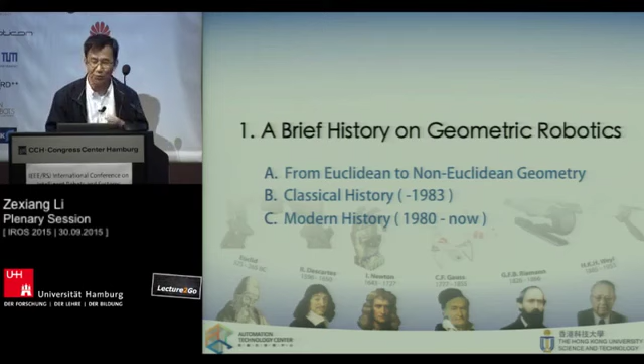So geometric robotics has two parts: one on the geometry, the other the use of geometric tools for the analysis of robotic problems.

On the geometry side, there is Euclidean geometry and non-Euclidean geometry. The central piece of Euclidean geometry is the Euclidean space and its geometric properties. Euclid, in his Elements, postulated the properties of Euclidean space. Descartes, through the introduction of coordinates, allowed us to identify points in Euclidean space with n-tuples of numbers, which we refer to as R^n.

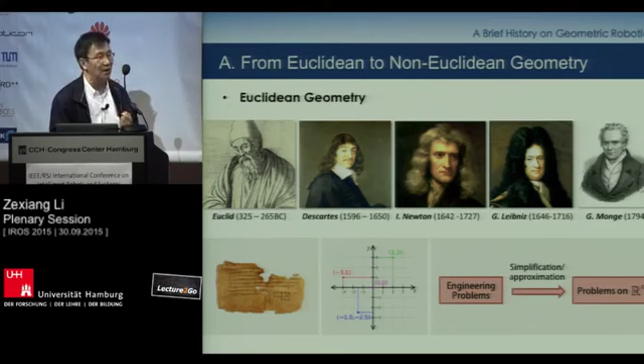Leibniz and Newton built calculus on Euclidean space, and 100 years later Monge introduced calculus to the engineering community. Today we know that by simplification or approximation, we can formulate an engineering problem as an optimization problem in R^n.

And those are the masters of non-Euclidean geometry. Gauss formulated one- and two-dimensional differentiable manifolds, which we know as curves and surfaces. Riemann generalized that to higher dimensions, three and above. Sophus Lie and Felix Klein introduced Lie groups and transformation groups, and the notation we use today is due to Hermann Weyl.

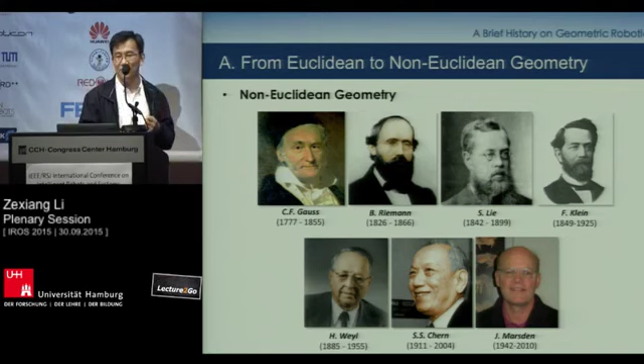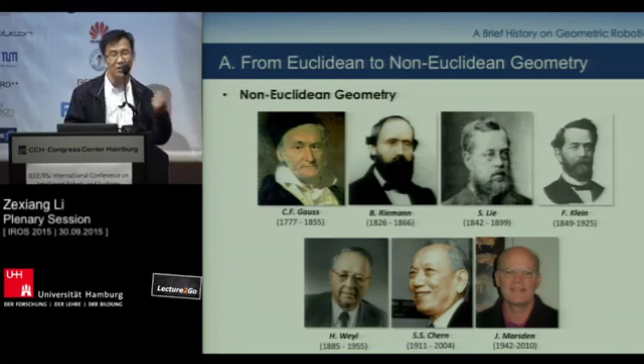S.S. Chern is a master in geometry, but his influence on the engineering program at Berkeley is equally impressive. Jerry Marsden built the bridge between the geometry community and the engineering community.

And of course, geometric robotics has its roots in the classical screw theory. That deals with the infinitesimal motion and finite motion of a mechanism under constraints. And Francis Reuleaux laid the foundation of kinematics.

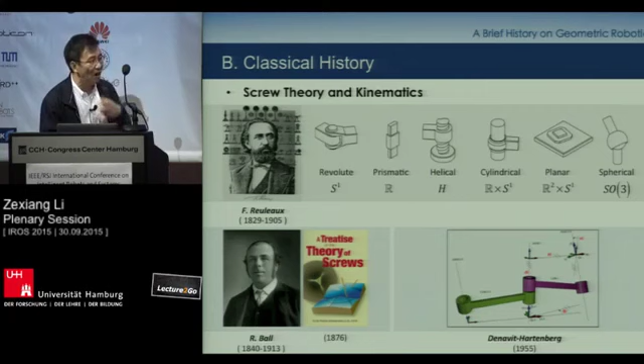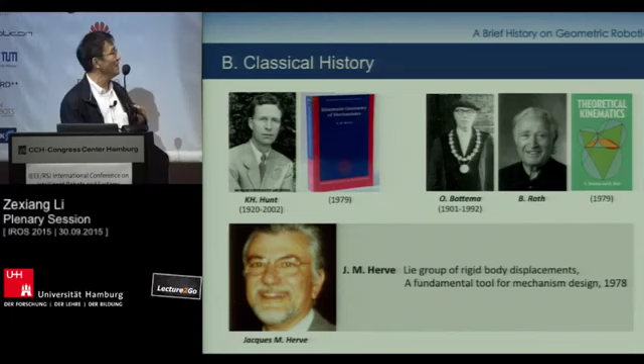He introduced the six lower pairs which generate subgroup motions, and Robert Ball, the foundation for screw theory. Hunt, Bottema, and Roth are masters of kinematics and mechanism design, and J. M. Herve used Lie group theory to study mechanism design.

So those are probably what I can call the classical history. The modern history of geometric robotics was opened up by Roger Brockett with his famous formula, the product of exponentials.

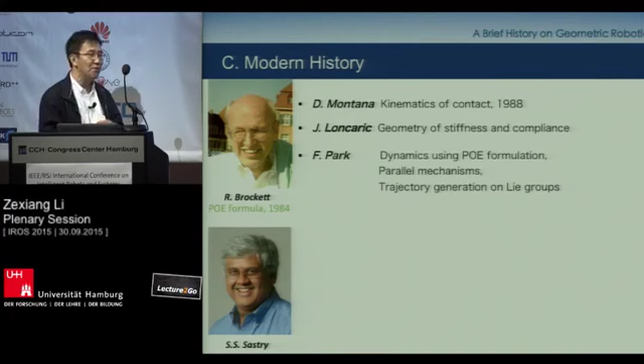He also produced a group of outstanding students who became important contributors to the field, including Montana, Loncaric, and Park. And Sastry started the Berkeley group along the same tradition with Paden, myself, Rich Murray, and also Ma, applying this to computer vision.

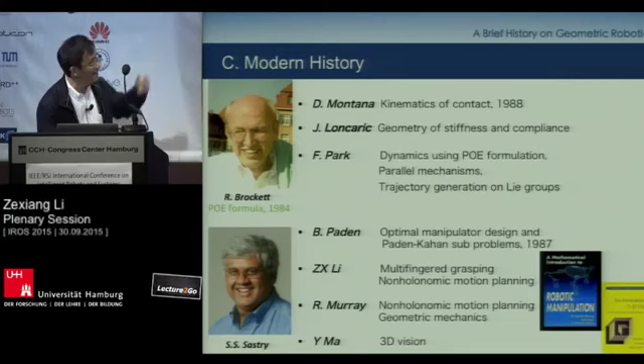And the work on manipulation is documented in these two books.

Tomas Lozano-Perez introduced the C-space concept, and also the MIT group, Mason and Canny, applied this to various other problems of robotics. And also the Burdick group from Caltech and his students applied it to snake robots, hyper-redundant robots.

Martin Buss introduced geometry to grasping force optimization and non-holonomic hands. And Vijay Kumar, from his wonderful work on flying robots, Lie group geometry is apparent there.

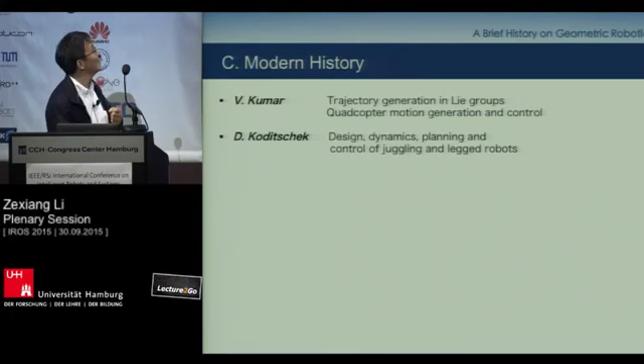Koditschek, the GRASP lab, and also those are important contributors.

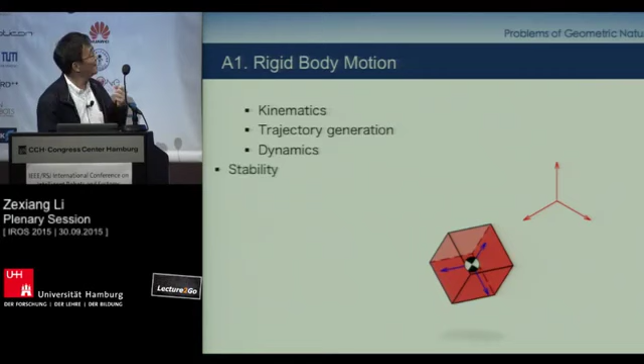So I will collect a few problems which are geometric in nature. In other words, without understanding the geometry underlying those problems, you will not be able to have a full understanding of those problems. These include rigid body motion, kinematics and dynamics control, and open chain manipulators.

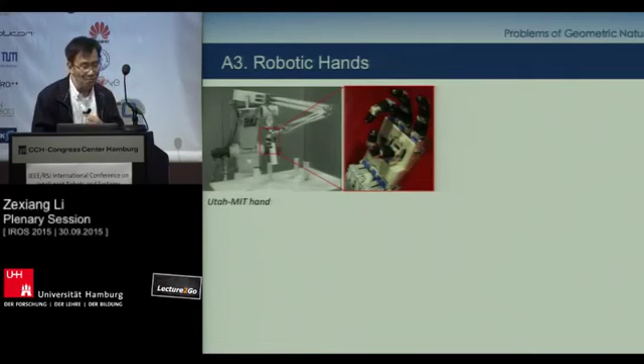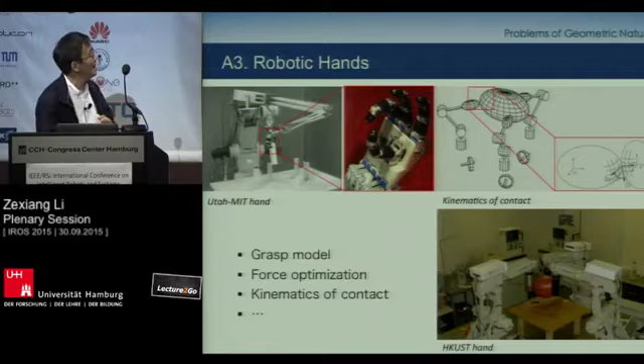The forward and inverse kinematics, and parallel mechanisms, the synthesis of robotic hands, how to model grasp, and also force optimization, kinematics of contact, and also parallel mechanism synthesis and design.

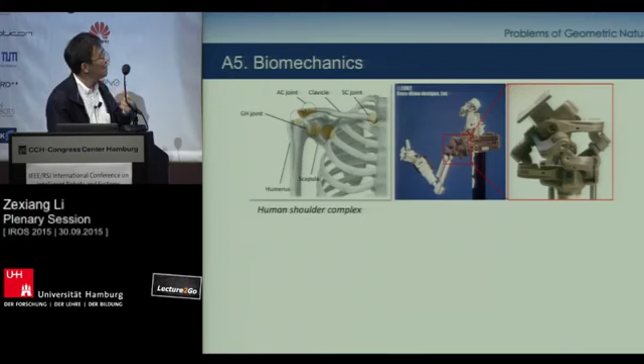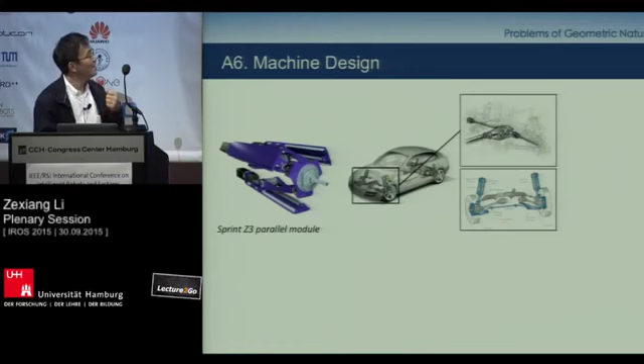Biomechanics: how do we model the joints of the shoulder, the eyeball movement, in a very natural way? And also critical components in machine design, such as CV joints and parallel mechanism machine tool modules.

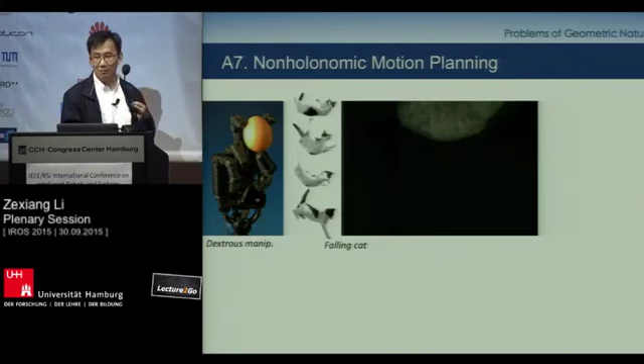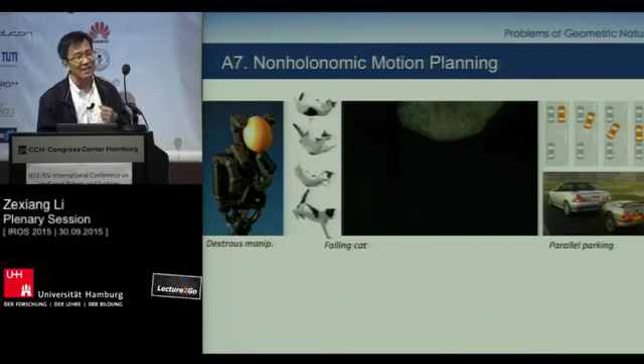And the non-holonomic motion planning, how do you manipulate a ball within the hand without dropping the object? How do you understand a falling cat reorient itself? And also, how do you understand parallel parking of a car, even with a number of trailers? So those are the non-holonomic motion planning problems, analysis, motion planning, etc.

And also some problems apparently don't have that nature, but you can model them as geometric problems. For tolerance control, you need to give mathematically precise definitions of tolerance notions and algorithms for their verification using vision, laser, all kinds of sensors.

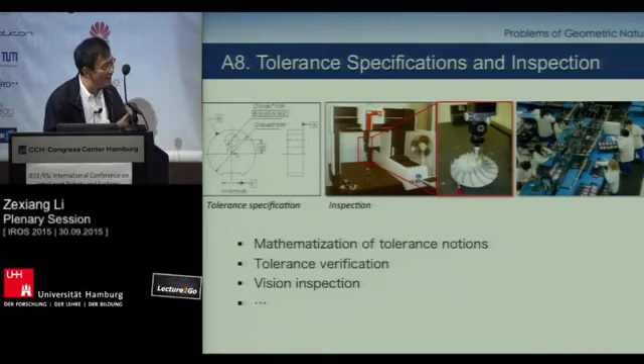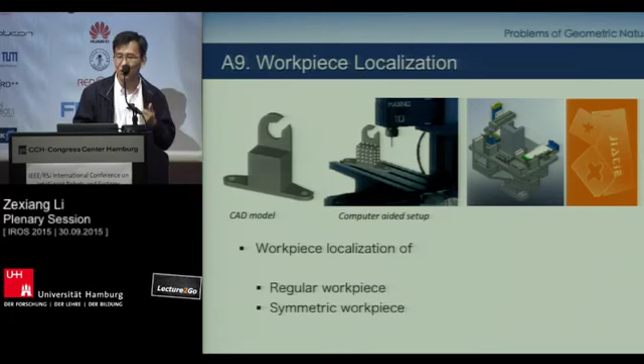And the localization of a workpiece, they either have no symmetry, have symmetry, or are partially machined workpieces.

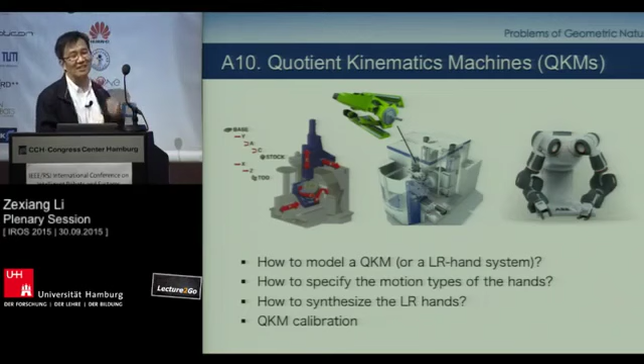And also for collaborating robots, left-right hand systems, which I call Quotient kinematics machines. The left and right hands may not be identical. So how do you describe such a system? How do you specify the motion types of the left and right hands? How do you synthesize such a system and their calibration?

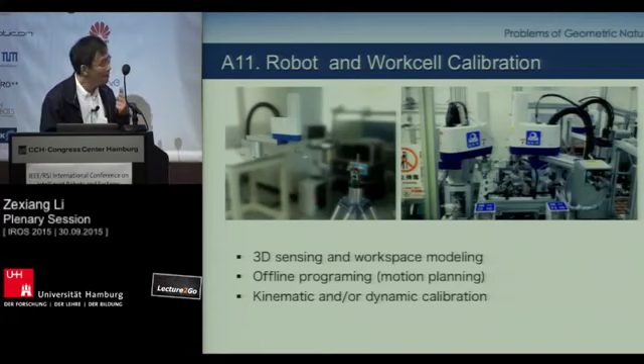And also now increasingly we use systems of robots for a Workcell. Many robotic systems are involved. How do we build the workspace model, offline programming, and the kinematics and calibration, etc. So these are the problems.

I will give a review, walk you through the basic concepts of geometric robotics. The main point is to identify the configuration space of the robotic problem with a manifold or Lie group, and then use the geometry of this space for optimization.

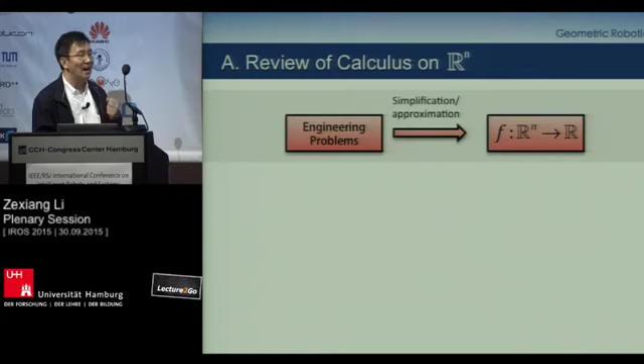Recall if we have a function defined on the Euclidean space, and we want to minimize this, we find critical points, use Hessians to decide if it is minimal or maximal, and to compute critical points, we have to compute the directional derivative. And to compute the directional derivative, we have to use the properties of the Euclidean space.

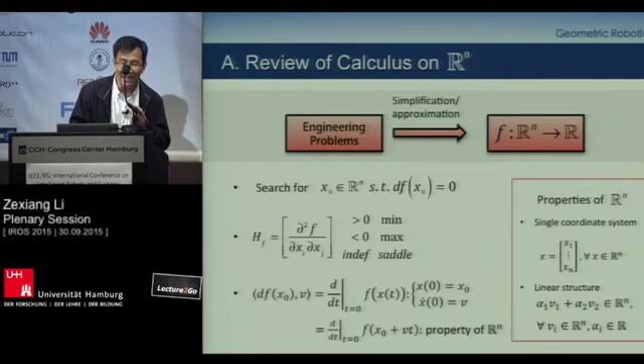And here are some simple properties of the space. It has one single coordinate system to identify all points of this space, and has a linear structure. But a manifold may not necessarily have all those desired properties.

An example of that is a unit sphere. How do we represent points on the unit sphere? We use latitude and longitude angles. We can do this except for the North Pole, South Pole, and the meridian line connecting those. Those are called singularities. Aside from the singularity, we have a one-to-one correspondence between points on the sphere and points on the coordinate plane.

So to make up for the missing points, we introduce another coordinate system, which also comes with its own singularity. For points other than the singularities, I will have coordinates relative to the red system and also coordinates relative to the yellow system. And we require the change of coordinates be smooth.

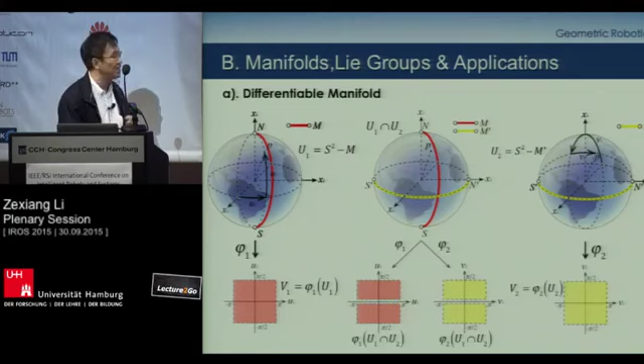So if we pile up all such coordinate systems until the union of the coordinate systems makes up the whole unit sphere, we have a differentiable structure. So a differentiable manifold is a unit sphere plus the differentiable structure.

Examples include the n-dimensional Euclidean space, the configuration space of a two-dimensional robot with revolute joints, and that of industry robots.

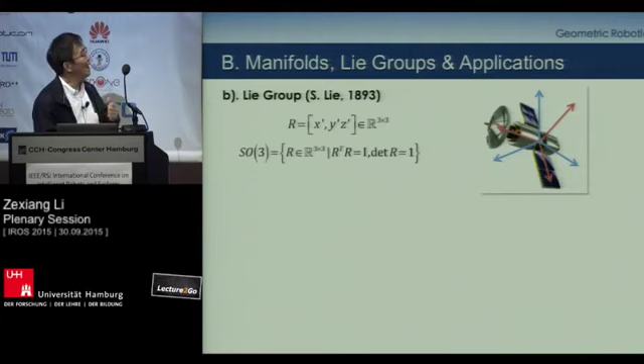A special example of a manifold is a Lie group. And we know in order to represent orientation of a rigid body, we use rotation matrices. And we found if we multiply two such matrices, we also get a rotation matrix. And when we take the inverse, we get another rotation matrix. So in other words, the set of rotation matrices forms a group, and the group operation is smooth relative to the differentiable structure of the set.

And that is what is called a Lie group. Another example of a Lie group is the set of homogeneous transforms, or the special Euclidean group of R3.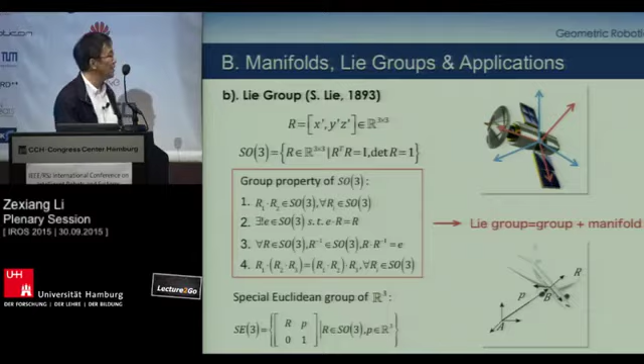And the advantage of a Lie group is that you have a canonical coordinate system to use for your computation, given by the exponential map. So if you look at the group and take the tangent space to the group at the identity, that is the Lie algebra. And that is how it looks like for those two examples.

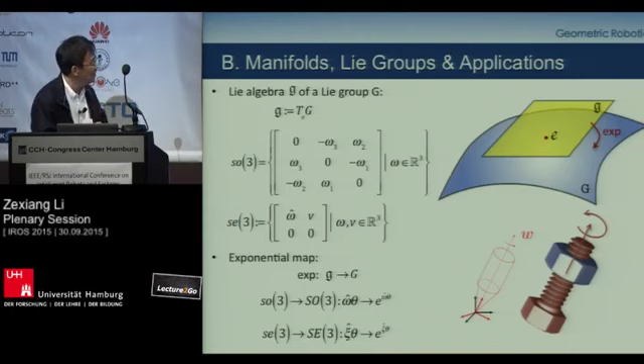And then you take the exponential, and for those two, the exponential is rotation about the axis or screw motion about the particular axis. And if we have a subset of a group, and if that is also closed under the group operation, it is a subgroup.

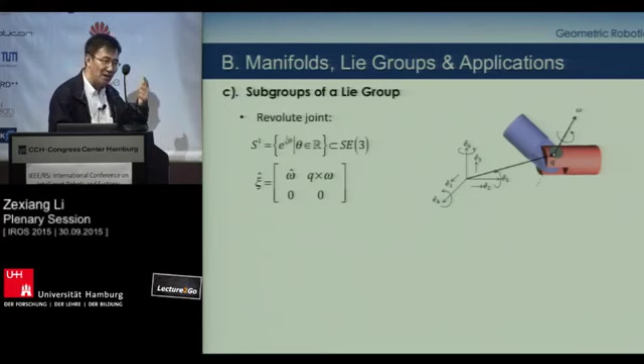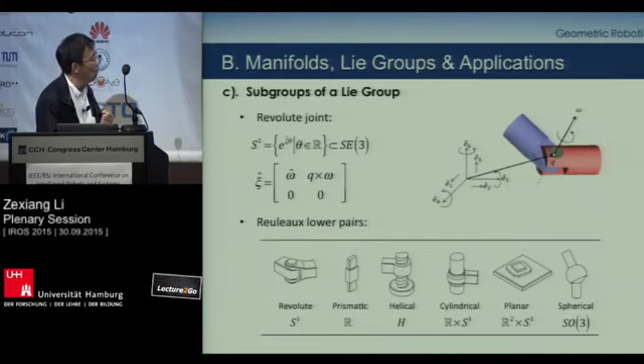So rigid motion generated by rotation about a revolute joint is a subgroup, and so are the rigid motions generated by the 6 lower pairs. They all form subgroups. And using those geometric relations, it is very easy to see the forward kinematics of an open chain manipulator is given by the product of exponentials.

And using this formulation, you have a beautiful derivation of the Jacobian, the inverse kinematics, and even proof of optimal workspace design of the elbow manipulator.

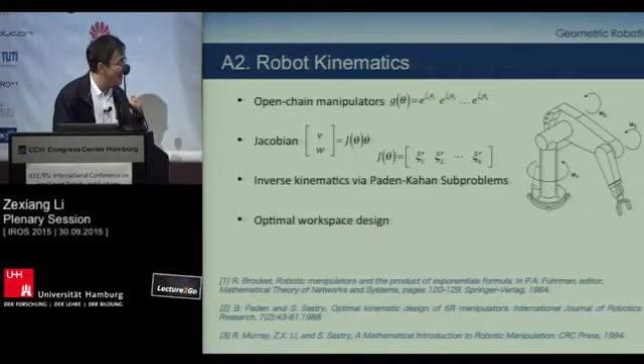And for the falling cat, we can model it as two rigid bodies coupled by ball joints.

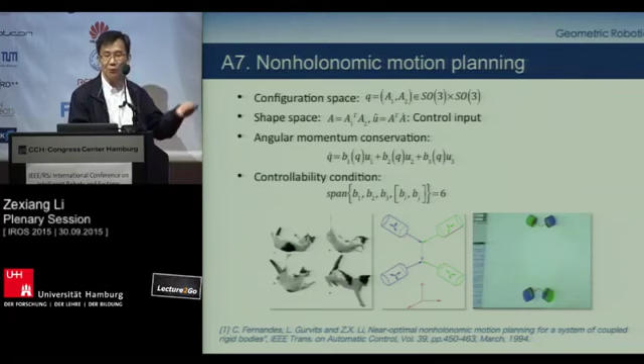The configuration space is then two copies of the rotation group. The control input of a falling cat is the velocity of the upper body with respect to lower body. If you use angular momentum conservation, you derive a nonlinear control system in its configuration space, and you can show it is controllable, and a falling cat is able to reorient itself.

If a subset of a group is not closed under group operation, but still smooth, it is a manifold, or submanifold. An example, a 2-dimensional example of the rotation group, is given by that of the universal joint. It's given by the product of 2 exponentials.

Another example is the exponential of a 2-dimensional subspace, and that is the configuration space for your eyeball movement. And those two are quite different.

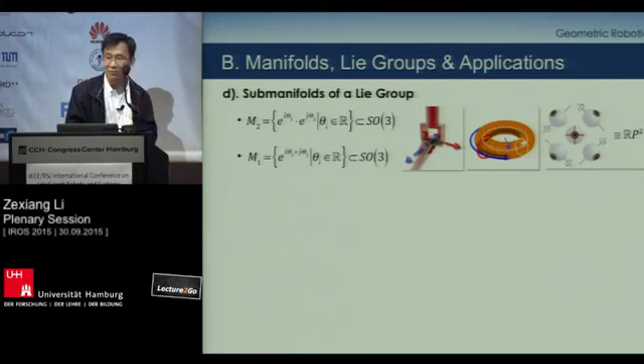Actually we found you can generalize that to SE3. You take any subspace of the Lie algebra. If they are closed under the triple bracket, then you could obtain an impressive list of spaces that models motion of a natural system: CV joint, eye movement, knee joint, shoulder joint, and even 5-axis machining.

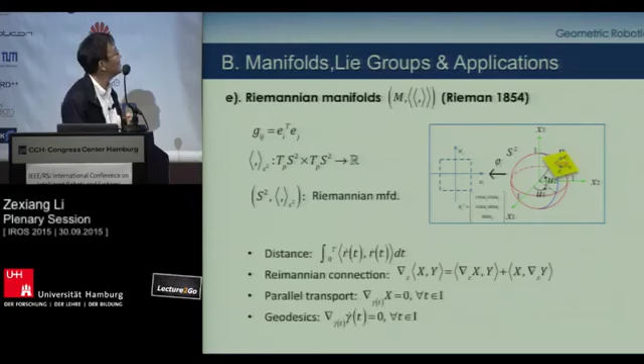If the manifold has a metric, then you can measure distance. This is called a Riemannian manifold, and you can define geodesic equations. And for the case of a single rigid body, using the kinetic energy, you can see the Newton-Euler equations are actually the geodesic equations, and this is coordinate independent.

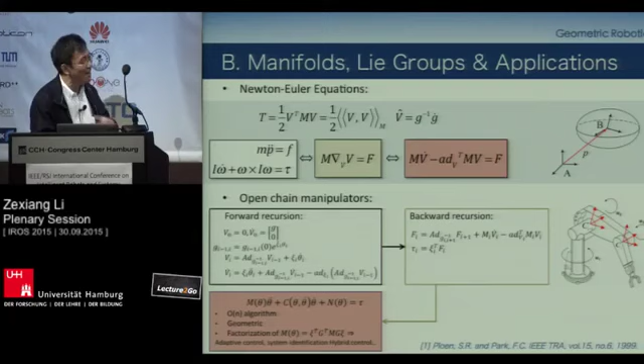Utilizing this fact, Frank Park derived the dynamics of open chain and closed chain manipulators that is very efficient and geometric. You can factorize the mass matrix, and the design of a control algorithm follows naturally.

If you manipulate a grasping object with your three fingers, you have a grasp map taking the finger force to the object force. Finger force has to satisfy constraints, okay, the friction cone constraint. And Martin Buss showed that finger force lies in the friction cone constraint if and only if a certain matrix associated with the finger force is symmetric and positive definite.

And this space is actually a Riemannian manifold. You can formulate the grasping force optimization problem as an optimization problem of a function defined on the Riemannian space. Actually, this function is convex, so you have a convex algorithm for its solution, which is very fast.

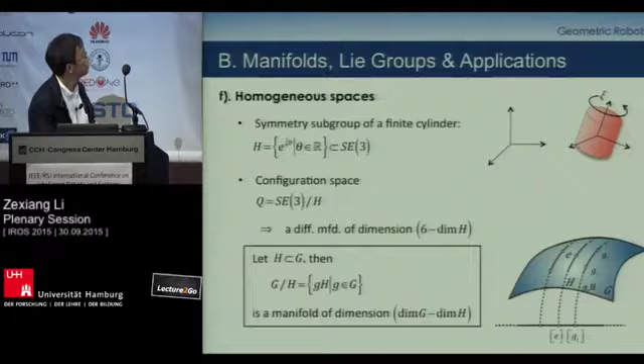And what does that do to us? Well, if you look at the workpiece localization problem, you can formulate that as a least square problem in SE3 if the workpiece does not have a symmetry. And if it has a symmetry, you simply replace it with all transformations ranging in the homogeneous space. You don't have to do anything additional.

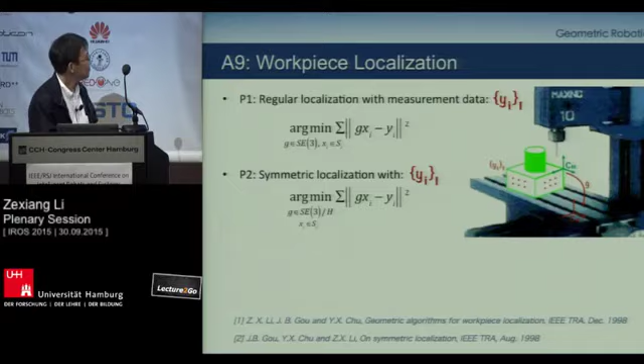The tolerance notions are all expressed graphically. They lead often to contradictory and imprecise interpretations, and sometimes the supplier and the customer get into a fight. So the way to do this is to give a precisely mathematical definition of all those notions.

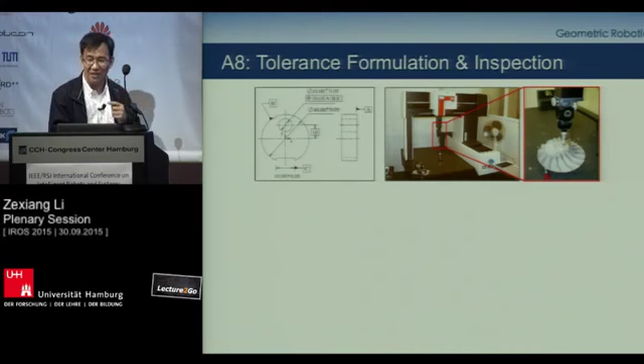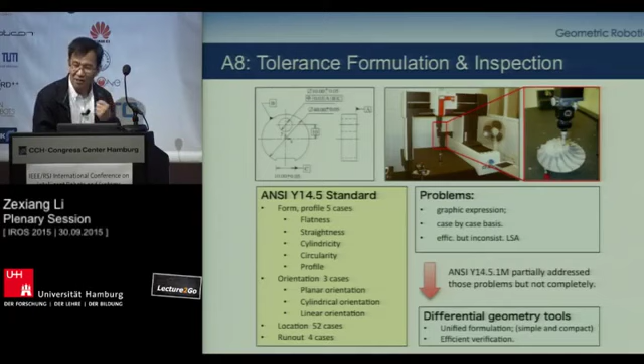And those are all possible cases of tolerance notions. You will find they all involve displacement of symmetric features, and the configuration space of those features you can easily discover. One example is the flatness of a particular surface. You can formulate the problem as a minimax problem in a homogeneous space, and then using relaxation methods, you can very fast have a solution for this problem.

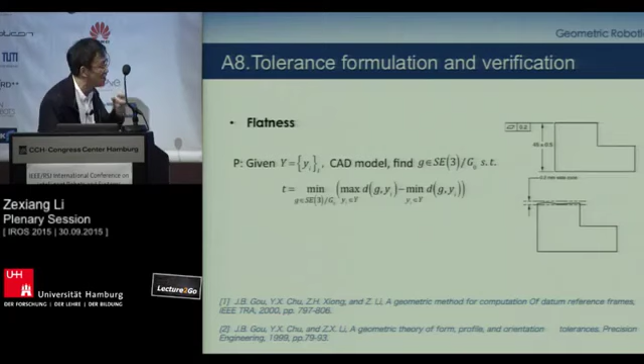So those are the sets of problems, and how we use geometry to address those problems. And we have good algorithms for their solution. So the next step is, what do we do with these results?

So this is some of the story. I got involved myself. We built a controller to implement the Riemannian optimization algorithm. Then in another event, a company from Shenzhen imported expensive machinery and could not get it to work. So we brought a controller, retrofitted it, and the company also made a fortune.

From this experience, I saw some good opportunities, because in the 1990s all electronic manufacturing migrated from the United States and elsewhere to China. Now that is a tremendous industry with about 20 million workforce. In the beginning, all machinery was also imported, but after a while the manufacturing process got localized. So we need to develop machines that incorporate the new processes, and to do that we need a controller to support this effort.

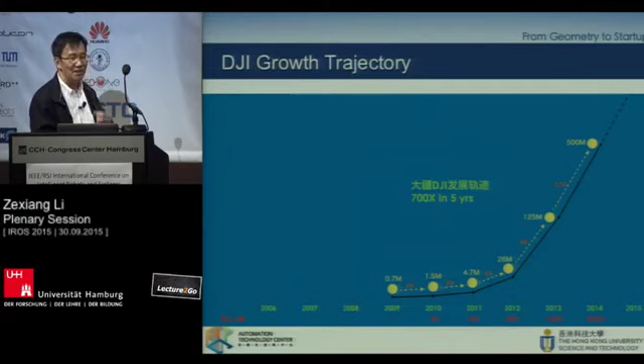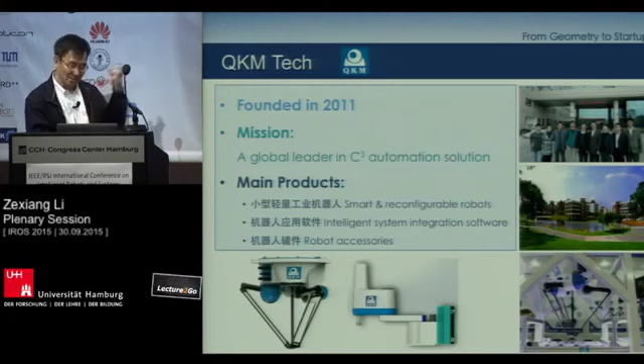For an internet company, you can achieve growth like that. The DJI story also inspired a lot of students in my own lab. Another group wanted to start an industrial robot company called QKM. So you know where the name comes from.

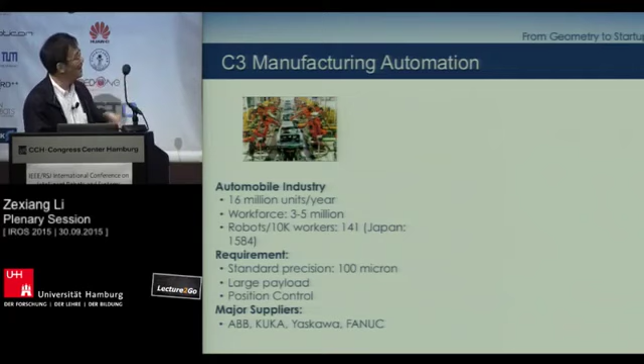When you talk about industrial robots, there are established players like ABB, KUKA, Yaskawa, and Fanuc. We did lots of market study and found that all those robot companies arise from automobile applications. Another industry in China, which I call the 3C industry, covers the manufacture of your iPhone, iPad, computer, and consumer electronics. Around 70% of global 3C products are manufactured in China. This industry is 4 times bigger than the automobile industry in China, which itself is twice the size of the US automobile industry. Yet the number of robots used is only 1/10 that of the Chinese automobile industry.

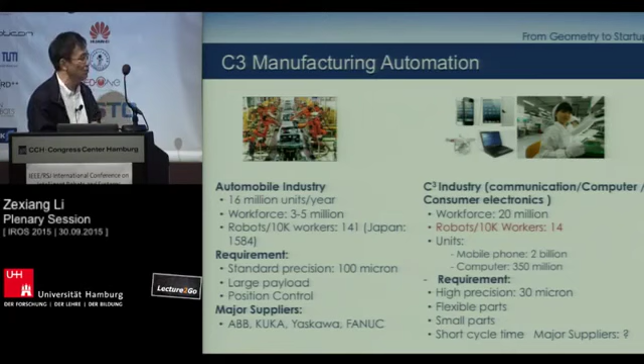The requirements are totally different, and no company has ever been able to provide a satisfactory solution. That is the aim of QKM. Another student project, e-propulsion, wants to be the Tesla of the water. So this is a summary of some of the recent spin-offs from my lab.

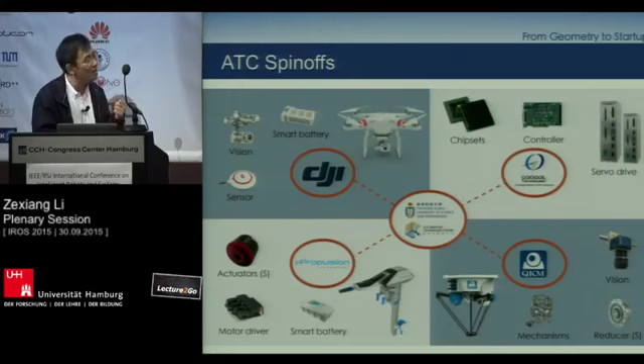So I look back to the place where I come from, that is Hong Kong, Shenzhen, and Dongguan. Some of you may not be familiar with that.

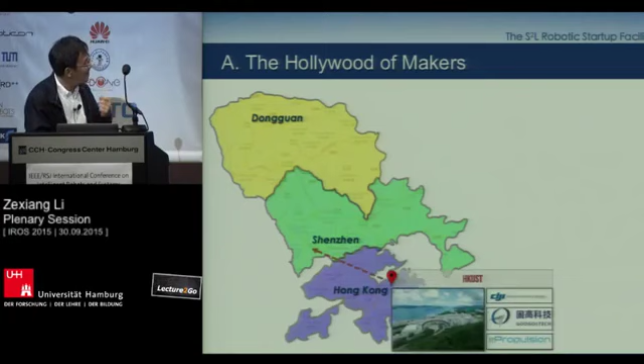And this is a distribution of some of the companies. VJ once came here and said, Zexiang, this place has a name. It is called the Hollywood of makers. And that is indeed true.

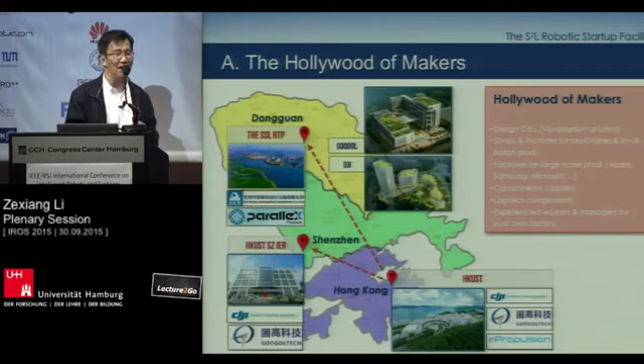There are hundreds, thousands, if not millions of companies that can help you do the design, do the prototyping, small batch, large batch manufacturing. You can buy all kinds of components and also logistic companies. If you want to set up your own production, you can do that in a week. If you are going to do this elsewhere, probably 6 months at a minimum. So this place supported those startup companies.

We spent lots of time to understand finally this place. We felt that perhaps other startups, young entrepreneurs from our own community, may also benefit if we do something to allow them to do this. So we decided to set up a robotic startup facility, and we like to open this to all startups from the community. And so that is how it is going to work.

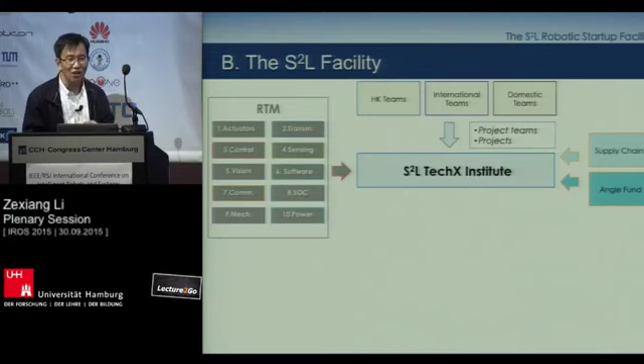When a group comes into the place, we can connect them with all the component suppliers, with the supply chains which we have already qualified, and even angel funds. So they go through all the processes very fast. And this is the place. We have around 26,000 square meters available, which will be tripled in 2 years.

And also for companies to grow their team, they need trained students. So we established a robotics school. This year we admitted around 110 students, and that will be increased to 300 in 2 years.

So finally, with a few more minutes, I'd like to spend some time to discuss the grand challenge that we have after the automobile case. So this is the C3 industry. All kinds of products from communication, computer, consumer electronics, and even automobiles are also becoming electrical. And 70% of all those products are manufactured in the neighborhood of where I come from.

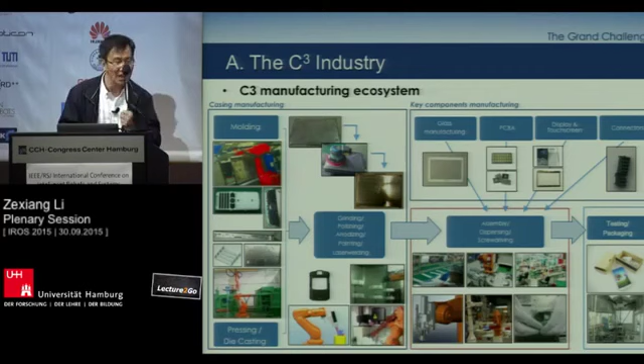And those are the typical manufacturing processes, from the casing to the key components and to the final assembly. Unfortunately, if you go to the production floor, you will see that except for printed circuit boards and a few key components, most of them are still manual.

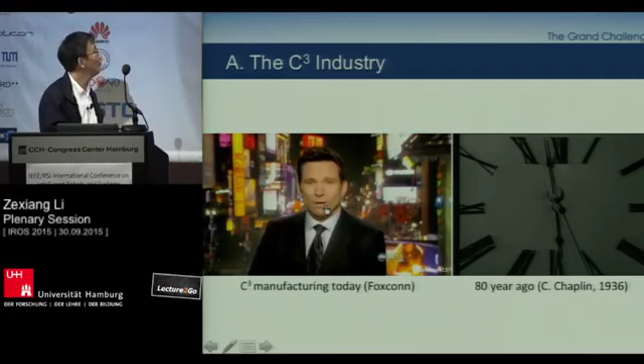A video from ABC News about Foxconn: 93 million iPhones last year and 40 million iPads, and the only reason they didn't sell more is that they can't make them fast enough. But that relentless demand has raised uncomfortable questions about how these precious objects are made and how the people that make them are treated. A few weeks ago, the company invited me to witness its first ever third-party audit of its biggest Chinese supplier, Foxconn. They're working on top secret projects for Intel, Nintendo, Dell, and many others.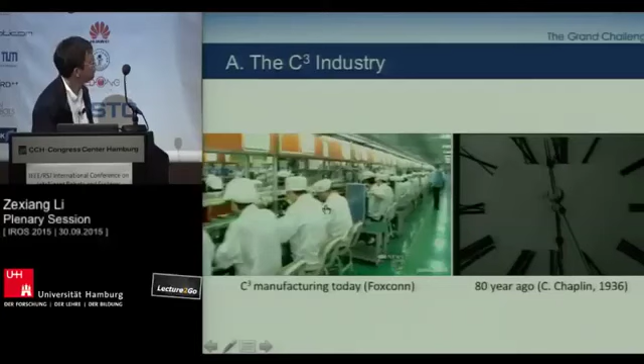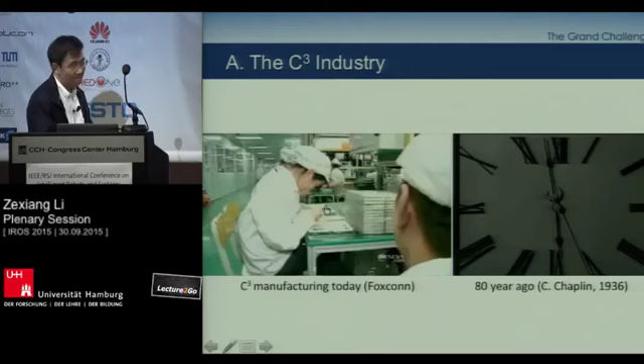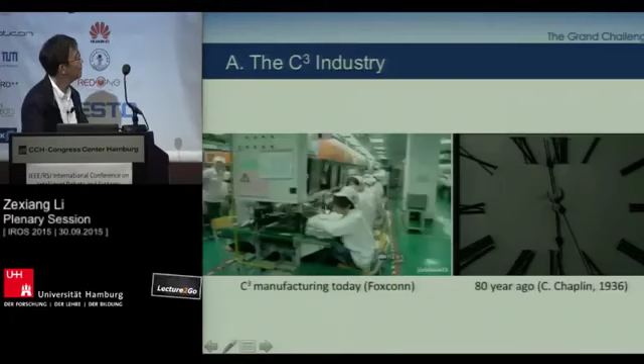How many steps are there? Around 141 steps. But it is time now to think different about Apple, because here it is - this is where your iPhone was born, and these are the people who brought it to life. My name is Bill. Nice to meet you. I'm first struck by how young they are - not 13 like some of the horror stories I'd heard, but 17, 18. No one looked over 30. I know many came from poor villages out in the countryside with the hope of making $2 an hour, but their haircuts prove that teen style lives everywhere. I was expecting more automated assembly, more robots, but the sleek machines that dazzle and inspire and change the lives of people 8 to 80 are mostly made by hand.

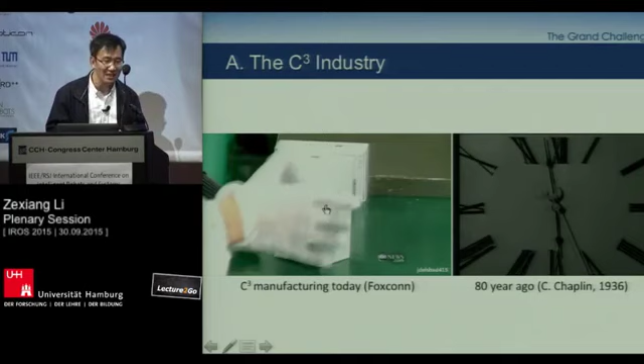And the company Foxconn in China alone employed 1.6 million workers to do all those jobs. And of course, if you compare what is at Foxconn, or in this industry today, with the industry perhaps 80 years ago, as depicted in the movie by Chaplin, they are very identical.

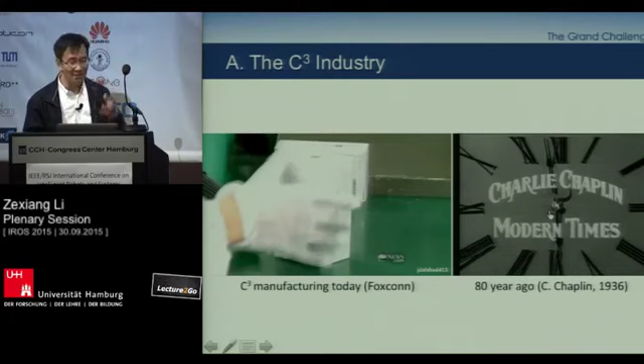Attention foreman, trouble on bench 5. Check on the nut tightener. Nuts coming through loose on bench 5. Attention foreman.

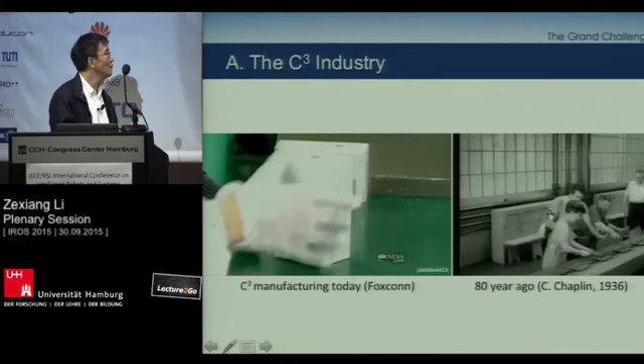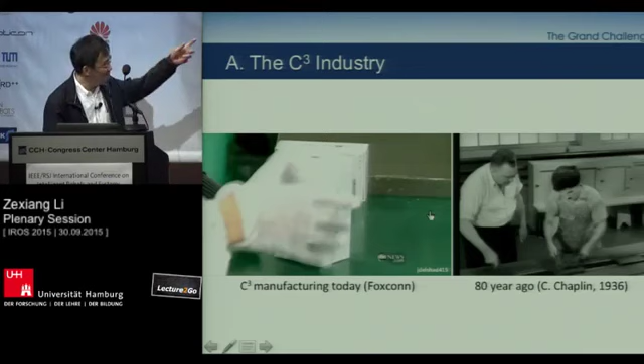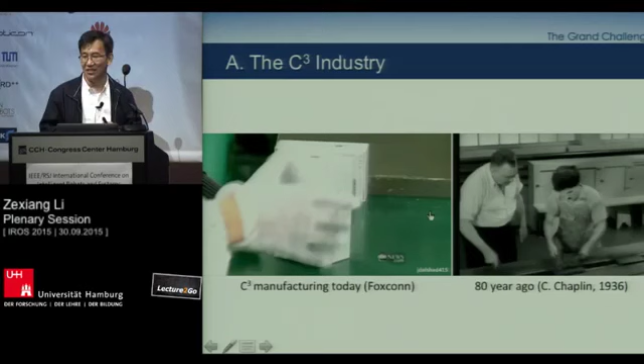Yeah, so you got to the point, right? You see that the whole industry today has not changed much from that of 80 years ago. And from the Chaplin movie, you also see workers are more or less treated like animals, implied, right? So how do we make a change on this? I believe that the change will take steps, and that is what is today. A typical line employs about 120 workers.

And as you have seen in the ABC News, even for casing machining, they all break down into 140, 20-some steps. And slowly, this is going to be changed. And we are sure because of the high rise of labor costs and shortage of labor, half of the 200 million workers, the whole electronic manufacturing industry will probably disappear.

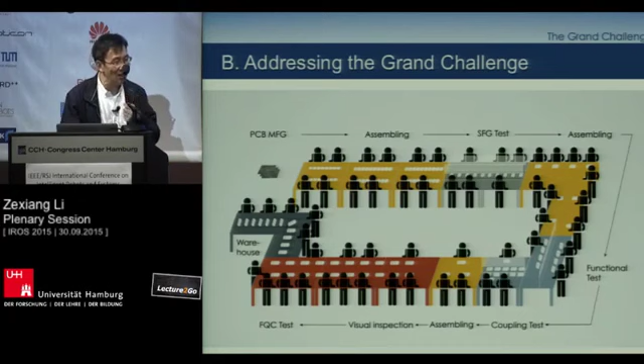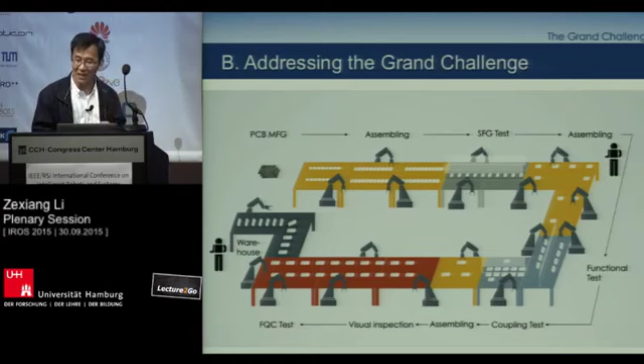So those will be replaced by robots, but not all at once. It will go step by step. So the next logical step is to replace some of the critical functions by robotic cells. And those robotic cells will work along with human workers. And as we acquire experience and build more and more robotic cells, we will have probably what we like to see: fully automated assembling and production lines for this industry.

So to address this grand challenge, I believe that the work that has been accumulated in the whole robotics community for the last 30 years will play a critical role. And here are our thoughts on how to approach the problem.

The first problem is the design of a modular, flexible, cost-effective work cell. Modular means it reflects the nature of the requirement. That involves low degree of freedom integrated robots, having compatible motion types, smart grippers, fixtures, parts feeders, sensing systems, and also automatic generation of work cell layout. In some industrialists' words: automated automation.

And the other thing is rapid deployment of the work cell. For an automobile line, you have one year to set up your production. And for this industry, you have only two weeks. So rapid deployment is the key.

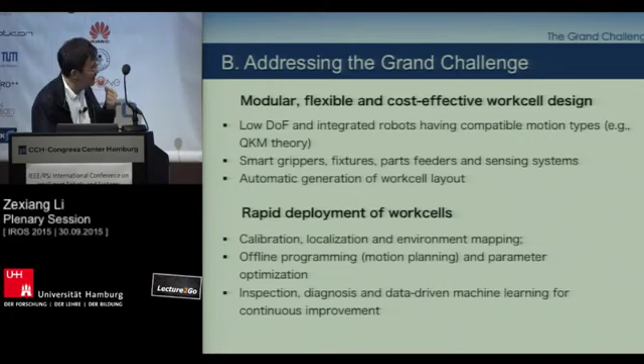And that will involve calibration, localization, environment mapping, offline programming, parameter optimization, inspection, diagnosis, and probably large data collected in this process can be utilized to continuously improve the production line. So that is where machine learning comes in.

So I think I can conclude my talk with a few remarks. First, geometric robotics provides a rigorous, precise, unifying tool for treating the diverse, complex behavior of various robotic systems. And through 30 years of development, this subject of robotics is now mature and also ready to go. And C3 manufacturing automation is the next grand challenge for the community. And I believe that geometric robotics will have a lot to do in this effort.

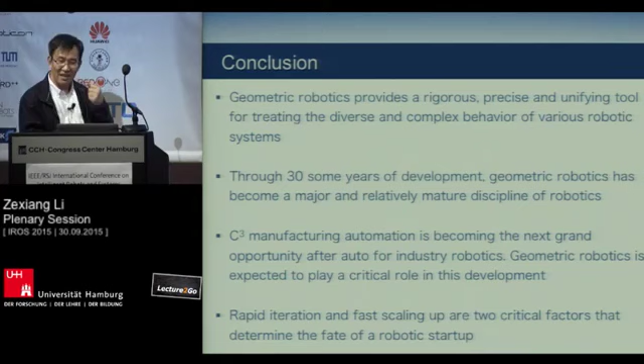And finally, for young students who are thinking to commercialize their research and find a new path, I believe that rapid iteration and fast scaling up are two critical factors that determine the fate of their startups. And the Songshan Lake Robotic Startup Facility hopes it can contribute to the success of their effort. So that is all I have to say. Thank you.